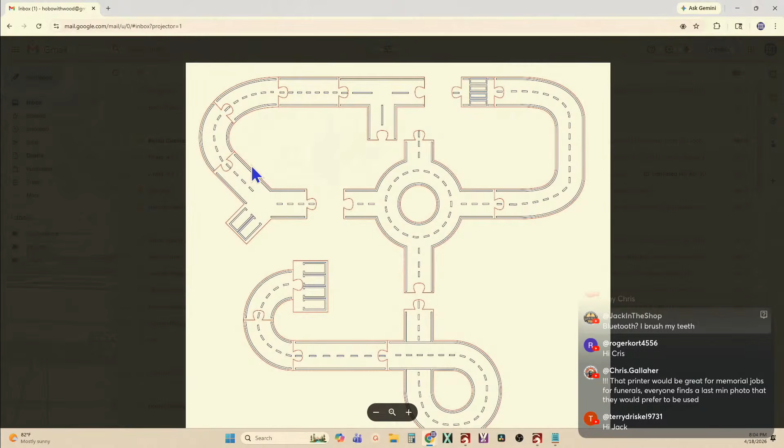I had a request - excuse me for drawing a complete blank, I think it was Barry, pretty sure it was Barry, that sent me an email asking for some help with something like this. Let's get it over here. He's wanting to do something for Hot Wheels, something he can laser engrave and cut out and disassemble. He said he bought a few different patterns but is having nothing but problems with them, which is typical when the stuff you buy doesn't say LightBurn ready or tested and approved - if they don't have an actual photo of the existing product, you can bet there's probably going to be problems with that file.

But I'm going to show you how easy it is to create that live tonight, and also something else that I did.

If you didn't catch this week's stream, but you did catch the live last week, I finished the photo for the memorial. And this is a friend of mine. She has passed, but this isn't a death photo. She hated having her picture taken. Every time I take a picture, she's just like, so, but after I put it in the frame and on here, it's like, oh man, it looks like I took it in the casket, but I didn't. She was a good friend, and I hate that she's not with us anymore.

But this I finished. It's the prototype. I haven't got that online yet because there's a few other things I've got to tweak. But I ended up going with a different color for the frame other than the leaves, and I used the reason that the maple leaves, baby maple leaves, really really small, they are red. And from what I understood, they're red to protect them from being sunburned. And so that's why I did that. And plus, the additional single sheet of the green that I needed was going to cost me $20. So I said, no, I ain't going to do that. So we went with the red.

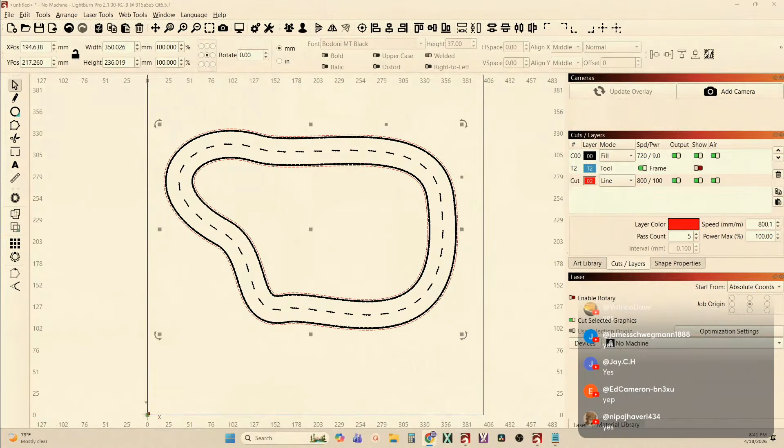Yes. Okay. Thanks, Jack. The problem is the way I've got this set up right now, I can't see your comments as big as I need to. They're very, very tiny. If I go back to this screen, oh, wait a minute. It's amazing how much you can forget in a week. There's the comments. I'm sorry. We'll get back to LightBurn now. Yep, there we go. I was trying to read them little bitty comments in the corner of the screen. That didn't work. All right. So now I've got you back.

Okay. So Barry is the one who reached out and said he wanted to make something for Hot Wheels. So let's take this and I'm going to say bye-bye. Now, this is my ghost machine. I forget what size this is, but that's the beautiful thing about LightBurn, you don't have to work with that. You can make it whatever size you want it to be. How big do you want your track to be? Do you want it to fit within a 4 foot by 4 foot area? Well, if that's the case, then draw your rectangle, and we'll go to inches and tell it to be 48 by 48. All right. So there's 4 foot by 4 foot.

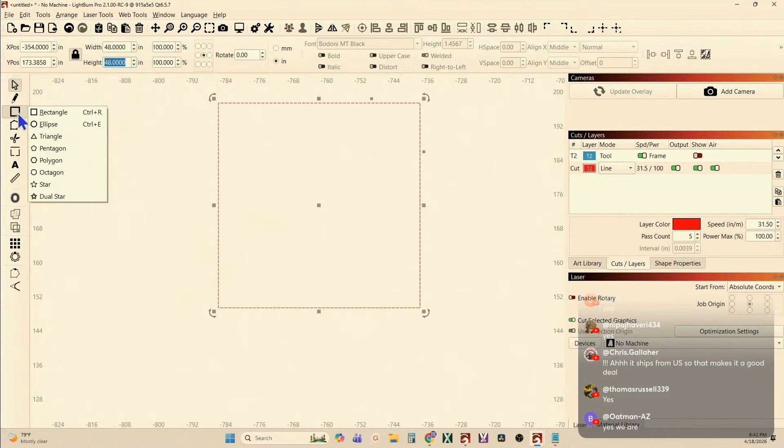Now I'm going to grab me an ellipse. Actually, it don't even matter. I could do a perfect circle, but since I'm going to drag this thing out and do something crazy with it, I'm just going to draw an oval to begin with. I ain't going to worry about making it perfect. There we go. Now, the image that Barry sent me had some crossroads in it. And you can do that, but you can't do it easily in LightBurn without running into problems. I want to show you again what Barry sent. There he is. Bring that over here.

So you see these are individual pieces that interlock together with puzzle fittings, so you can snap them together. But here's a loop. That's not a big deal. But this down here, well, I guess that would be an intersection. If you wanted to do a living hinge and actually have it raise up so one would go under, you could do that. But here I see these lines now. That's just done like an intersection. Yeah, I don't really like that. You bring it around. Okay, stop sign. Gotta wait. Okay, clear. Let's go.

But when you do this, and I'll show you the problem that this creates, wrong button, I need to go back here. Sure as the world, if I don't show you why it's a problem, somebody's going to try it and go, "What's going on?" But first, we're going to go through this real simple process. No loop-de-loops, nothing like that. We're just going to make a road course. So I've drawn a 4 foot by 4 foot area, and I've got an oval here in the middle. I don't want just an oval. I want to create a road course.

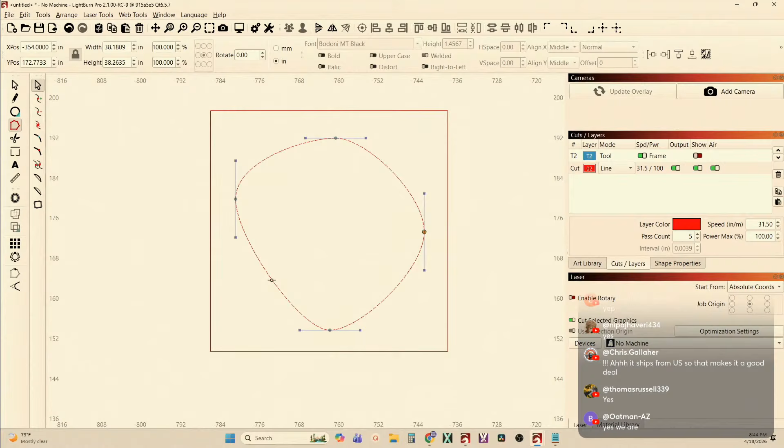So to do that, I'm going to convert to a path, go grab my nodes, and now I'll just start pulling nodes around. I want it to be contained within this 4 foot area. So I might pull it over here to there, and then this one. And actually, you know what? This is going to be my center line eventually, so I need to leave enough room around the perimeter so that I can do that. And maybe I come over here and hit letter I, insert a node, bring that up here. We're going to draw that down and draw that one on up here. So we'll start with that. In fact, we'll make it a little more like a kidney bean. All right. So there's my road course.

I'm going to take this, and now I need to think about how wide do I want each lane to be, and I want 2 lanes. I want 2 lanes, and I'm doing Hot Wheels. It's been a while since I played with a Hot Wheel, but what's that about?

We'll go big. We'll say each Hot Wheel is about 25.4 millimeters, or 1 inch. So that's 2 inches, and then a 1/4 inch on, so 2.5 inches overall. That'll give us two 1-inch lanes and a 1/4 inch on that perimeter. So if that's the case, I've got this selected. I'm going to come over here and do an offset, and I'm going to say both inner and outer.

And I'm in inches right now for you folks over there. And for the rest of the world, I'm in inches, I'm sorry. We'll do 2.5 inches, 2.5 inches. All right. So now you're starting to see a road course, right? Do not delete your original. Keep that. Say okay. Now you've got the inner and outer. You got this right here.

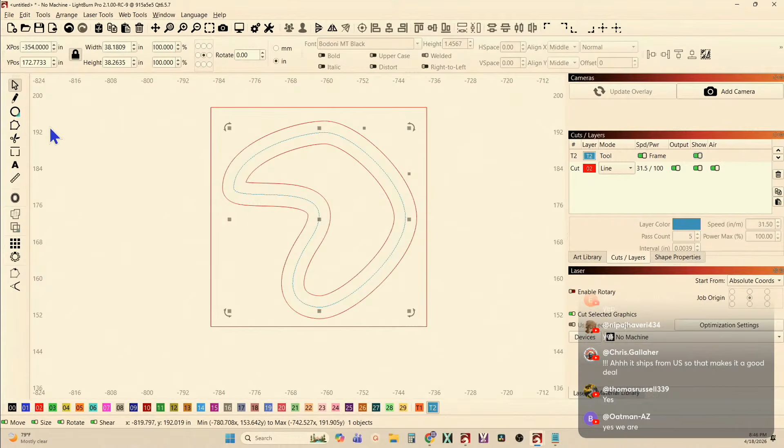I'm going to take this. I'm going to turn it into a... oh, where did my palette go? It disappeared. And when that happens, minimize and maximize. And there's my palette. All right. So there, I can put that on my toolpath. Turn my toolpath back on. Now that my toolpath's on, I'm going to come over here and grab my pencil tool. And I'm just going to draw a line. I'll put that line on the black layer.

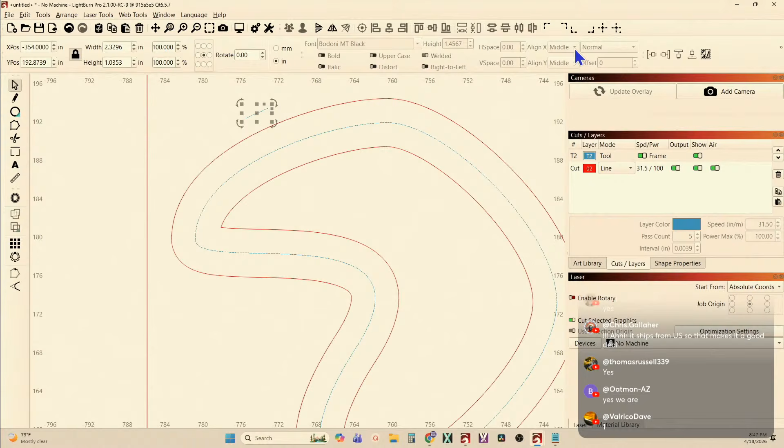Oh, and there, my palette's going. This is a new release candidate, folks. I'm on 2.1 release candidate 9, and I've got an issue going on. I've just started using this today. And when that palette disappears, that has something to do with Windows and the scaling options. Minimize it, maximize it, it brings it back. So I've not run into this until just now, because I've just started using this when I started making that memorial piece today. But let's put that on the black layer.

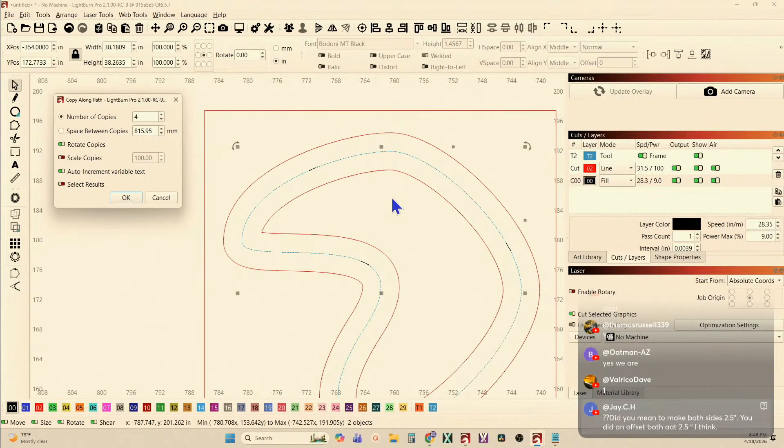Now that's on the black layer. I'm going to bring it down here. We're going to make it a little bit smaller. There we go. And I'm going to put it there on the line. And now I'm going to hold shift and select the toolpath, go to arrange, and copy along path. And I'm going to move this over here out of the way so I can see my dashes. I can't see the bottom because it's not a live screen and you can't scroll. But you can see here, these are not oriented correctly. You need to tell it to rotate copies. And now it'll rotate the copies and stay on that path.

Let's give it 40 copies. That looks pretty good. 40. Say okay. And now if you want to see that really good, we'll come over here and turn the toolpath off. There you go. Now, I don't want those little bitty dashes. Those are going to be extremely difficult to see if you try to engrave them. So I'm going to hold shift, click on this black layer, and that selects everything in black.

Did you mean to make? No, I didn't. Did you? No, you're right. I should have done an inward and outward offset of 1 1/4, which would have been a total of 2.5 inches. So yes, Jay, you're right. Cardboard cookie for Jay. He found a goof, but watch how easy that is to fix.

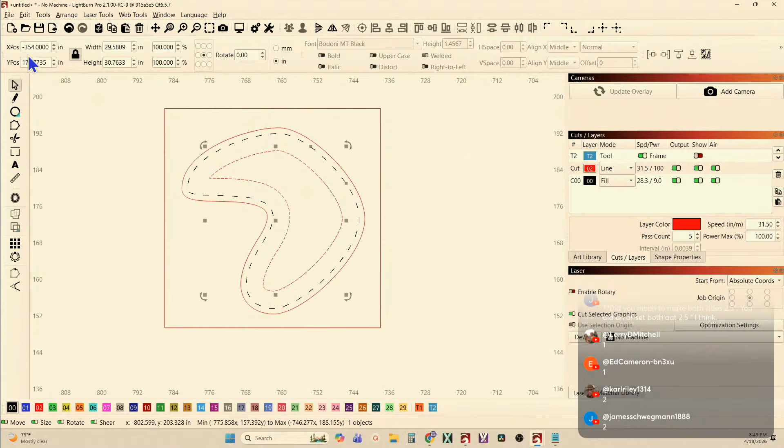I just got to come back over here, do an inward only, and do 1 1/4, and delete the original, and come back over here, and same thing. Oh, no. And here, there's an example of how, when you try to do a loop, the way LightBurn looks at those, there, I needed to go the other direction, but because it's an internal piece, you have to think backward. When you take and twist it, and you'll see this in a minute, what was out becomes in. So you need to be careful when you start twisting it.

So I'm going to Control Z, undo that, and come back here to offset. And this one needs to be outward instead of inward, and delete the original. Okay. So now if I zoom in and measure that, that should be 2.5. So from there to there, yeah, 2.5 inches. Thank you, Jay. So there we go.

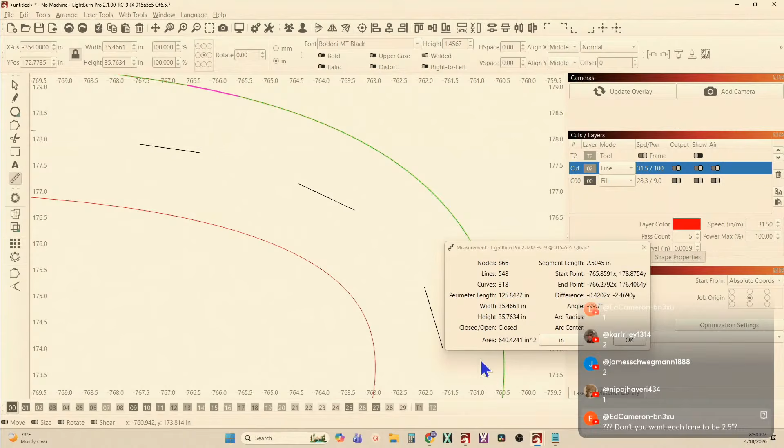But now hold shift and select all of the black layer. And now do an offset of all of that. But let's do maybe 2 millimeters, not 2 inches. I need to go back to millimeters, offset 2 millimeters, and delete the original. Say okay. Now you've got some pretty good dashes that are going to engrave around your road course. But here, actually, I need to say offset outward. Yep. And we'll do 3 mil. Say okay.

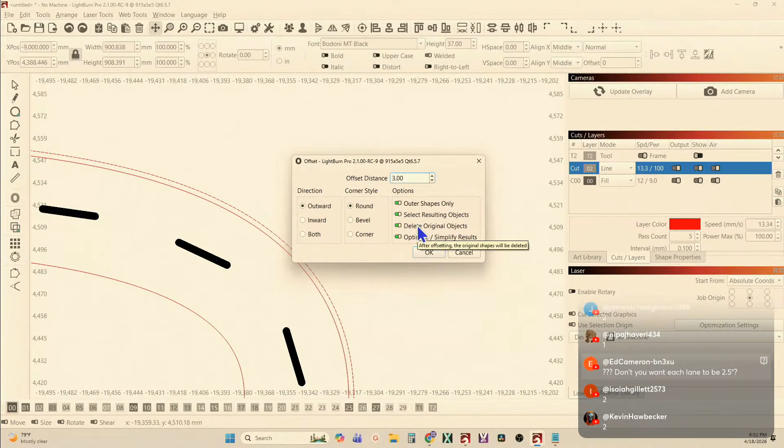Oh, I had to delete on. Change that. Go back. Offset. Turn off your delete original objects and say okay. Now you've got those there. Now I just did a 3 millimeter offset.

And because that's what I did and said okay, if I want to recreate that exact same offset without having to go into the offset tool, all I have to do is hold control, select the line I want to do an offset on, that one, hold shift and click on the offset tool.

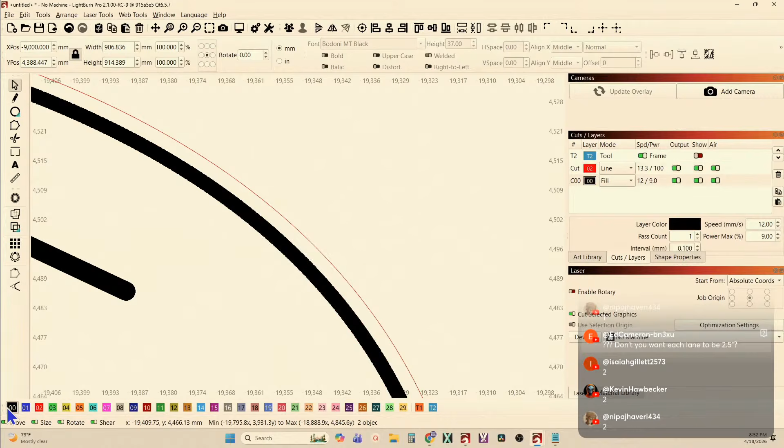What happened? Did it do the wrong one? There's one. Yeah, it did it there. And I want to see why it did what it did. Outward, inward. And say okay. All right, now you'll see why I wanted to do that. If I grab these two, put it on the black layer, there's an engrave, and there's my cut.

So come back over here to this one, and now I want to do an outward 3 mil and say okay. I want to do it again, so I can hold shift and just click on it, and there we go. Select those two, put it on the black layer, and now I got a road course and dashes, and it's, you know, ready to set up and cut out.

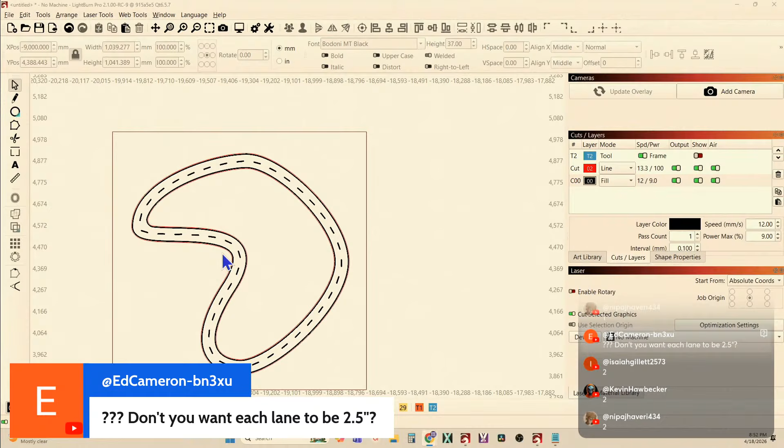No, it's not. No, I didn't want each lane to be 2.5 inches because the cars are maybe an inch wide, maybe. And actually, I don't even think they're an inch wide. They're probably about 20 mils, maybe about 3/4 of an inch. But right now this is about the process because I don't have them Hot Wheels here. I'm going from memory, and I'm thinking they're about 3/4 inch wide.

But you could, if they're needing them bigger, and plus this is something else that somebody asked me before. Before Barry specifically asked for something for Hot Wheels, I've been asked multiple times about how to create something for HO trains. They're not dioramas, but you want to create a city or a town or whatever. Well, if you know what your scale is, you know how to scale up your design.

This is about the technique about how to get there. You use your scale to begin with to help figure out what your big dimensions need to be. Now you know what they need to be. Now I'm showing you how to get it there. You need 2.5 inches for drift racing. Yeah. And that way you're not worried about hitting the car in the other lane.

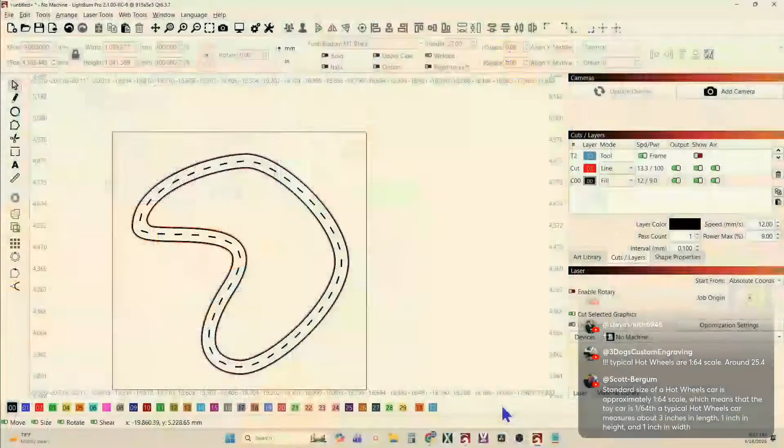So back to LightBurn. Back to LightBurn. That's not LightBurn. That's LightBurn. All right, so how am I going to get this out?

Now, I would want to know, what material am I going to cut it out of? How big do I want these pieces? And that's something else to think about. How are you going to, when it's taken apart, how are you going to store this? And what have we got here?

Typical Hot Wheels are 1/64 scale, around an inch. Okay, that's what I was going with. So this gives me a 1-inch lane with a 1/4 inch curb. Standard size. Okay, we got it. So I was guessing, and I guessed right.

All right, I used to collect Hot Wheels, but a long time ago. Still got some of them. Squirrel! All right.

So how are you going to store it? Where are you going to store it? Something you could do - you can make your own box to collect it and put it in. And then you could make it whatever size you want it to be. But do you want it to be something that's 18 inches, 16 inches long, that you got a whole lot of shelf space? Or do you want to make it all fit within a 12 by 12 area? Think about that, because now you've got your design, you need to know how it needs to be constrained.

And for this demonstration, we're going to go with 300 by 300, or 12 by 12. So I'm going to do, and I have not done - I'm doing this right now for the first time. I've got the concept, but I haven't done this, so we're gonna see a couple of undos. But what I would start with would be...

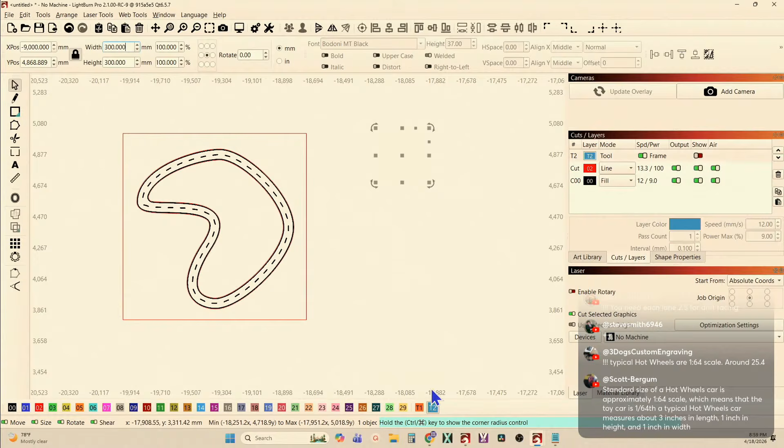A 300 by 300 square, not a rectangle, 300. Put that on a tool layer for now, turn my tool layer back on so I can see it. Put that in the left top. There we go. Now I'm going to take that and do a grid array. I'm going to do 4. I need to turn off my random orientation, do 0 spacing, no padding between edges.

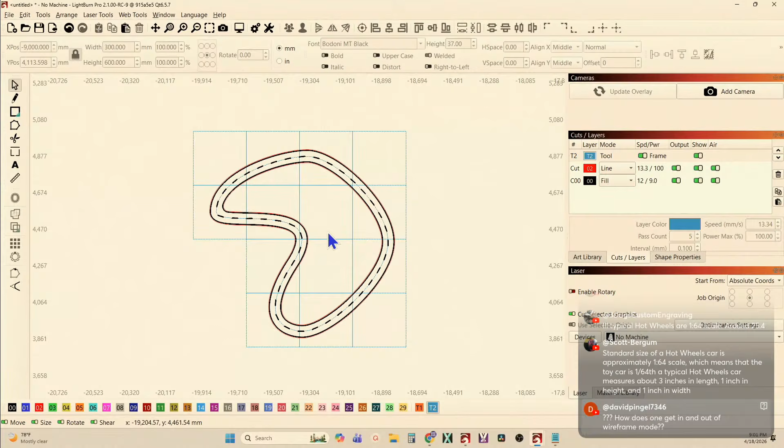So I can say, okay, in fact, I can go ahead and get rid of this. Goodbye. So now there is all the pieces that would be required to cut this out. I can see I don't need that - oh, ungroup it. I don't need them, delete those. And the rest of them all have something on it.

How does one get in and out of wireframe mode? You can do it a couple of different ways. For me, I use the keyboard shortcut, Alt Shift W. Get over here, Alt Shift W, and that goes in and out. Alt Shift W, Alt Shift W. But if you go into Window, right here, wireframe smooth or filled - and see, that's extra work to go in and find those. So Alt Shift W is easy because you can do it right there with 3 fingers. Alt Shift W. Alt Shift W. All right.

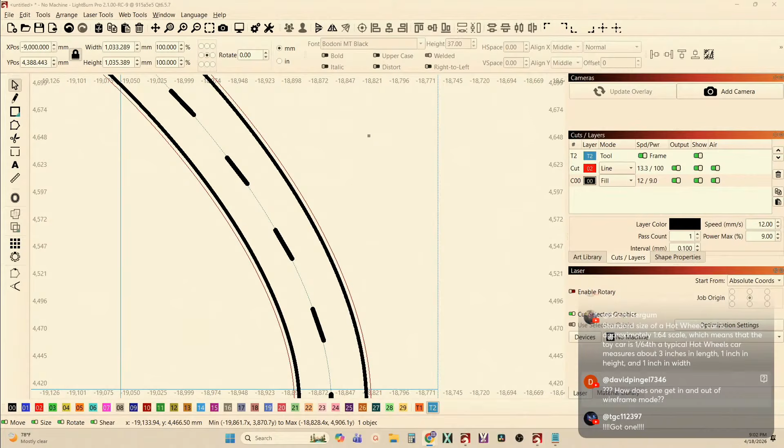All right, Alt Shift W. There we go. All right.

So now, like I said, I've got a grid. I can see what fits in here, but these are 12 by 12 or 300 by 300 pieces of material. You don't want to try and cut that out from edge to edge on a 300 millimeter piece. So you would actually want to create that grid probably out of 10 inch by 10 inch. That gives you about an inch around each side of it. All right, so...

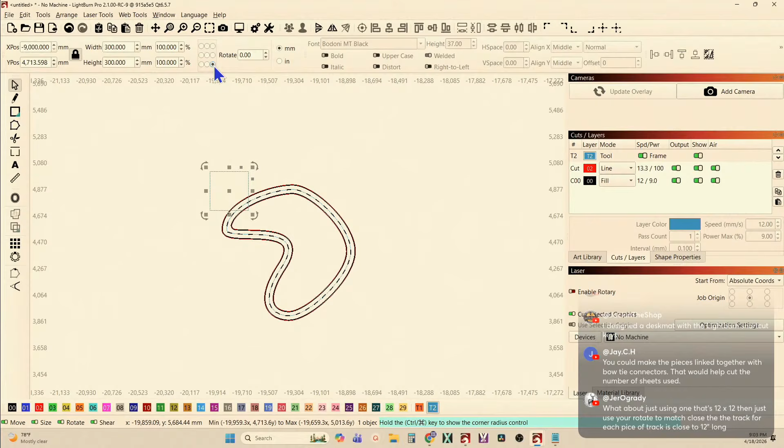Let's do that. Told you we're going to do some undos here. We're going to get rid of all of these, and we're going to take this one. I'm going to put my anchor point at the bottom down there and tell it to be 10 by 10, and then do the grid array.

All right, so now I can see where I'm at. Get rid of these, I don't need that one... or those first. Well, no, that's it. All right, we'll start there.

Now you've got a 10-inch piece right there. You see that's going to need to snap on. You can move these around and position them however, but how do you create the puzzle pieces? How do you get them to interlock with each other? That's what everybody wants to know. Well...

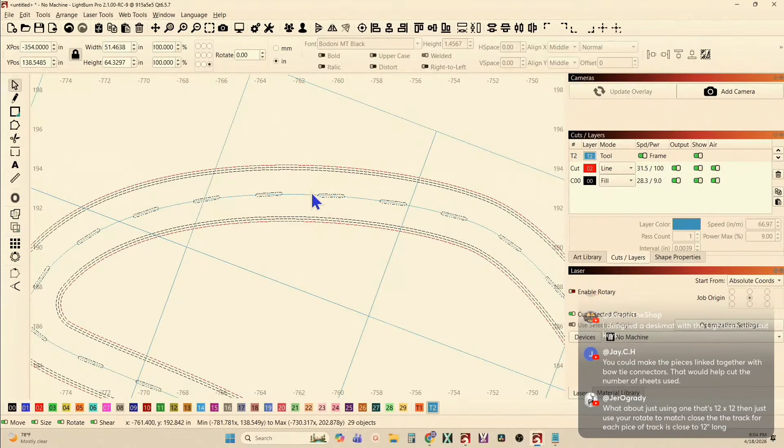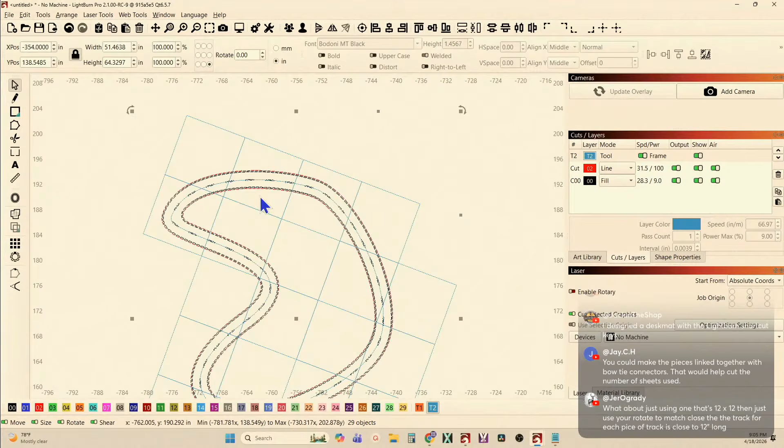How important is it that you are perpendicular to the curb? Is it a big deal to have—and this is all personal preference—but if I put that cut there to where I'm about 90 degrees across that road, and I can put a straight line here and put a puzzle piece in here, that's going to bisect it, put it in 2 pieces. But if you're not worried about it being perfectly perpendicular, then you can just put the knobs in there anywhere you want them to. That would be the easier thing to do instead of trying to constantly rotate it and all that. And it's a puzzle, it doesn't matter. As long as it's in the center, I think you'll be all right.

But how would I do that? Well, I'm going to grab my pencil tool and come down here and first draw a line—a straight line that goes from one to the other. There we go. Let's put that on... I'm going to get my selector tool, put that on the cut layer. And see, my layers are going again—this is an update issue. Put that back on the cut layer. There we go, all right.

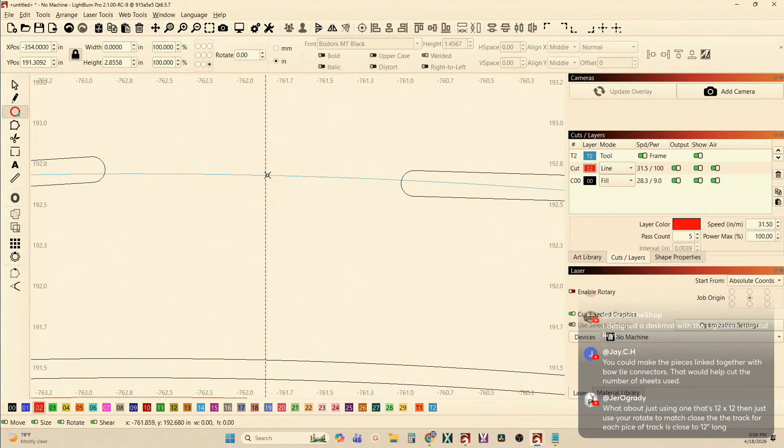Now I'm going to get a circle and come right here in the middle. I'm not going to draw a perfect circle, but I am going to hold control—is it control to hold? Yeah, holding control will keep it there in the center, so it expands from the center. Control shift gives you a perfect circle, but I don't want a perfect circle. I do want that oval, I think.

Perfectly perpendicular parallelograms, yep, had a few of them. And that's about 3/4 of an inch, give or take. I like the oval shape. It needs to be able to interlock with one another—that's why I went with the oval. The circle would probably work too, but I like the extra reach of that oval reaching in there.

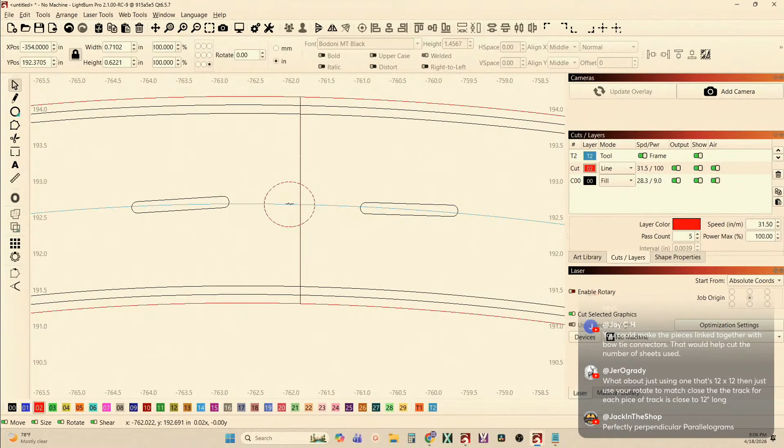But once I had that centered up there, I need to pull it off center, keeping it on the center line like that. And then I can create with my scissor tool—scissors right here—get rid of that, and that. Now I've got a piece that's going to interlock in there because this comes back in so that when you snap that together, it's extending inside there. So it's not just going to be slid together, it's locked together. All right, so there's that, that's done.

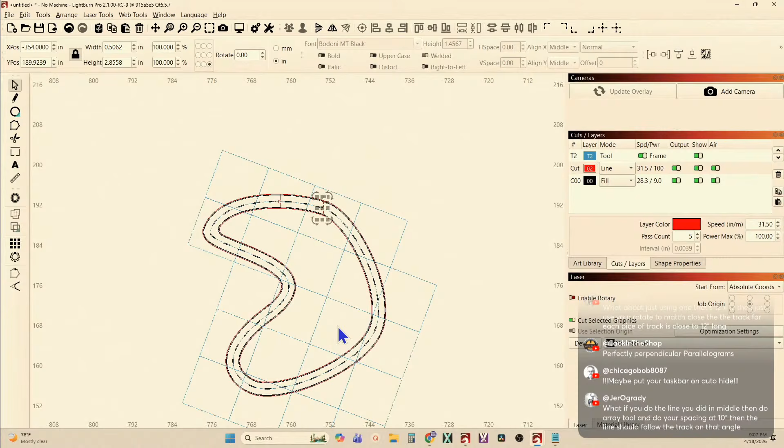Now I could actually take this, go back to my selector tool, and I've got that. I can just say duplicate that and bring it around to where—and now here's where you're going to start playing with your pieces, positioning. I'm guessing you probably don't even need this now that I look at it. You're going to take this right here and position it where I can get the maximum amount out of that piece of material, which would be about like that. And I'll take this piece and rotate it.

And put it in between the lines, in between the lane markers. And I could even flip it so that it had a nipple on this side, a nipple on this side if you want to. But now, that's going to give—you can keep doing that and keep positioning. In fact, I just thought of this.

Watch this, this is pretty cool. This is actually going to be really cool.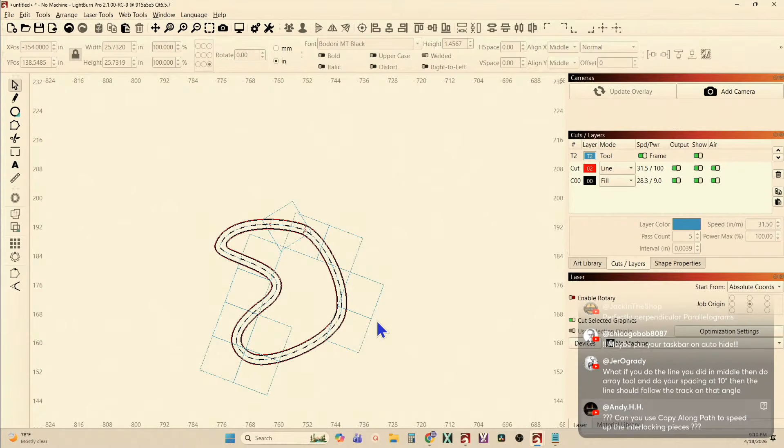So, let's do all of those suggestions. Let's get rid of this, let's get rid of this, because this is actually going to be a much, much better way to do it.

All right, first let's do -- oh, you know what, I think you can even just get rid of this one. I've got this one original. I'm going to select it, hold shift and select that center line that's there, and then tell it arrange, copy along path.

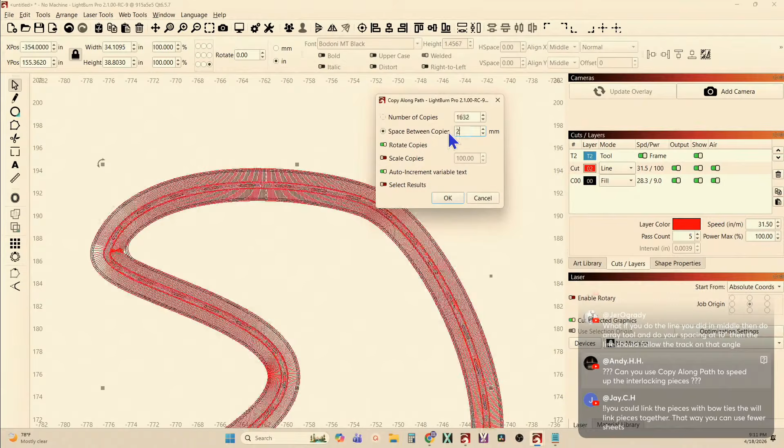It needs to rotate with the copies, and then set the space between copies to 250.4 millimeters, that's 10 inches. All right, so now those are spaced 10 inches apart.

Now, there's a couple places where that has a problem with your little lane markers, but that's for looks, it's not going to be an engineering issue. But there, we just made our interlocking pieces and spaced them 10 inches apart from one another and rotated them around the design.

Say okay, done. That's done. Now let's take and get us a square. Oh, let's see, I need to get my tool path. Dadgummit.

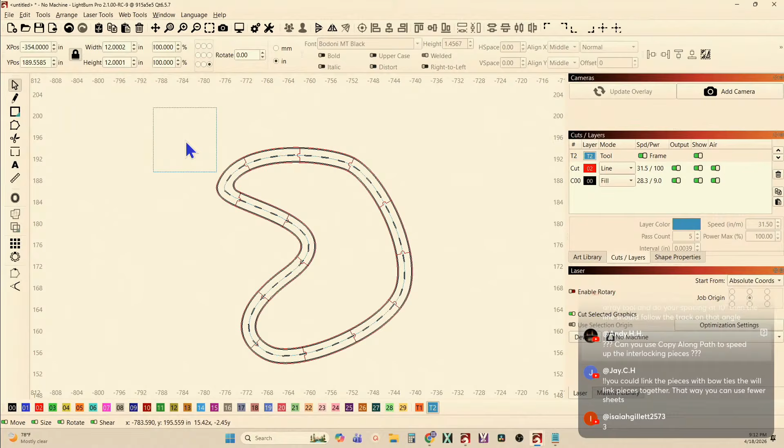Tool path, rectangle. And we're going to tell it to be 12 by 12, or 300 by 300. Now take that and we're going to put it in the center of one of those pieces like that.

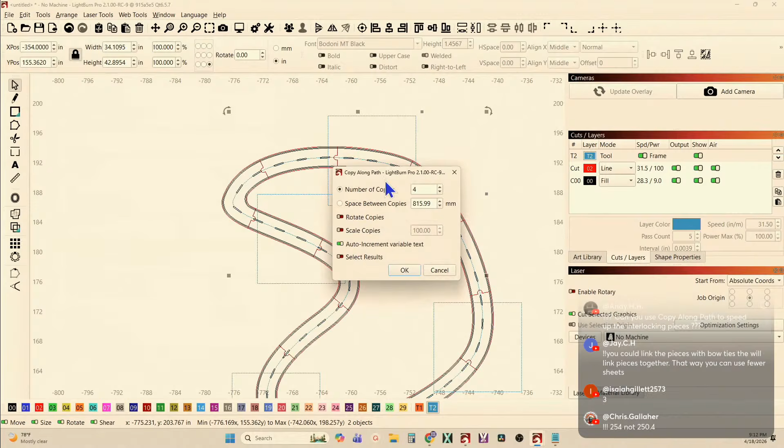There we go. And then hold shift, select that tool path and go back to arrange and copy along path. We need to rotate the copies. And how many copies do we need? Well, we don't know, that's what we're wanting to find out.

We'll just keep increasing them until that right there would work. That would work. Now, right now we've got individual cut lines and they're not attached to the pieces. Let's go say okay, done.

So now we know that each one of those pieces are going to come out of a single piece of that material. But this cut line, that's a single cut line, and I need two of those, one for each side of that.

Oh, did I? You did. You're right, I put the decimal in the wrong point.

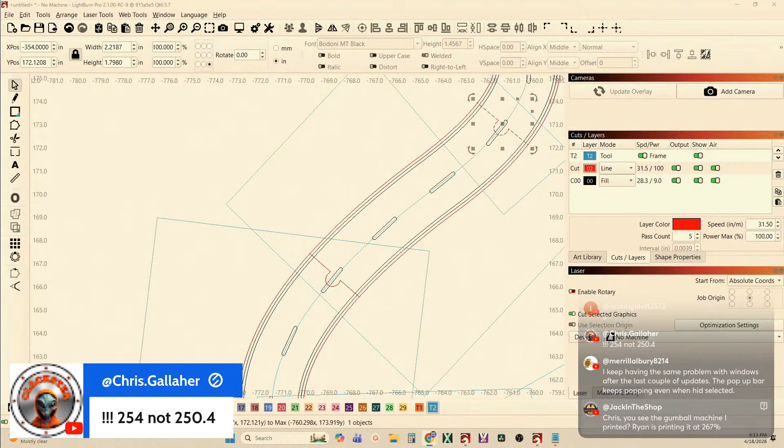You could link the pieces with -- oh yeah, bow ties would work too. You could use fewer sheets. I don't follow you on how that would use fewer sheets. But bow ties would be something else that you'd have to keep up with. You got to think about this, are you doing it for yourself? Bow ties would actually look pretty cool if it's something you're doing for yourself and an adult's doing it, and it's going to look good and you're going to keep up with it. But if you're doing this for your grandkid, bow ties are one more piece that's going to get lost. So, but yeah, bow ties would look cool.

Not sure what that means, Jay.

All right, so back over here. So I could come in here and select that and select that one, and I'm going to Control D, duplicate it. So those two are duplicated.

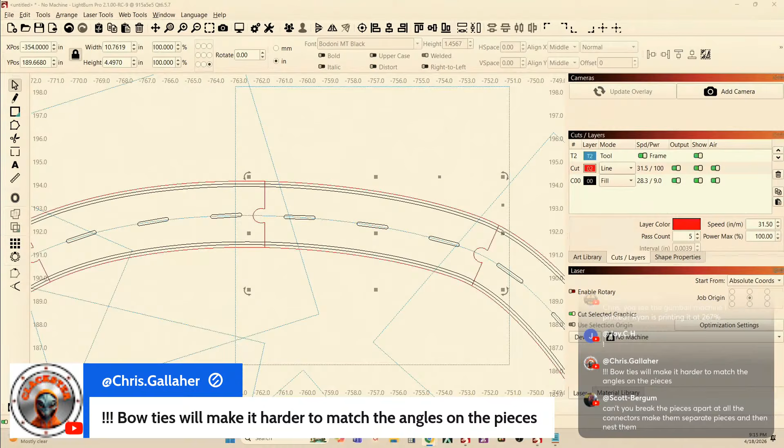And bow ties will make it harder to match the angles on the pieces. Yeah, because if you're in a curve or something like that, you'd have to be real careful with putting the design together.

Can't you break the pieces apart at the connectors and make them separate pieces, then nest them, and get more than one piece out of it? Absolutely, once you've got them, we need to know that you're going to definitely be able to get it on the material, but once you've got them out, yes, absolutely you could do it.

Each sheet would be 12, not 10. Yes, each sheet would be 12, but I'm doing this at 10 inches just to make sure I'm able to get it onto the 12-inch piece and not have it too close to the edge, or if it was an odd shape like this corner piece, making sure it all fits on there.

Again, we're learning together about how to use copy along path. We're doing a lot of that tonight with creating the lane markers, using copy along path to help strategize how many sheets we're going to need. Is that necessary? Might not be, because once we've confirmed we've got them all there, we can see that it's all going to fit on that many sheets.

But as it was mentioned, you can nest some of these and get multiple pieces on one individual sheet. This is just to ensure they will all fit on at least one sheet, that nothing's too big, and by keeping it under your maximum size, you're double ensuring you've got room on your material.

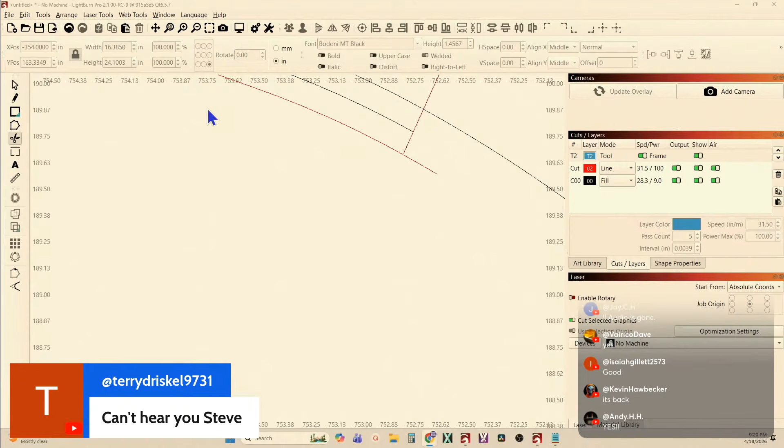Let's select this piece, go to node editing, and just hover over that node and hit the letter E to extend. Because if I try to drag that down and past it, I may or may not keep it in a straight line. But if I just hover over that node and hit the letter E... well, it ain't gonna work. E is supposed to extend that straight down to that line.

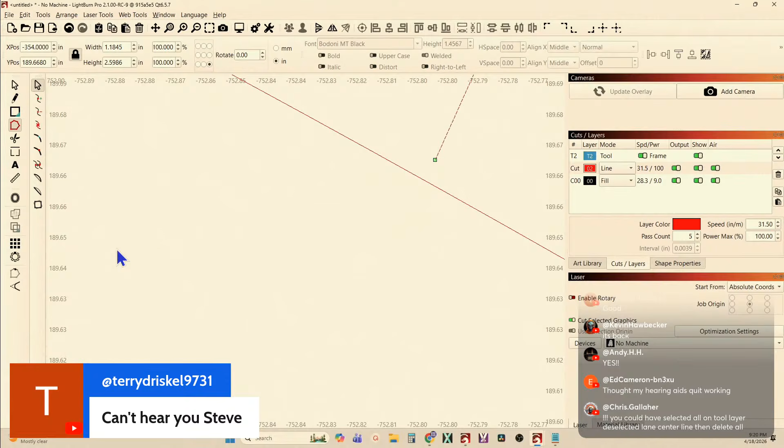I'm having all kinds of problems with this release candidate 9, Chris. Stuff's not doing what it's supposed to do, it's not working. You could have selected all on the tool layer, deselected the lane, and then deleted all.

I think some of my issues, and see, the color palette's going again, I think some of the issues I'm having tonight right now is this release candidate, because I didn't have any of these issues with release candidate 8 or 7. So something's going screwy here.

In fact, I need to stand up, so let's hit our magic button. Hit our magic button. Oh my. Oh, and I've got a back brace on I need to take off for a minute. Okay, I almost feel like grabbing 1.7 and starting over, but we're too far into this to do that. Oh my.

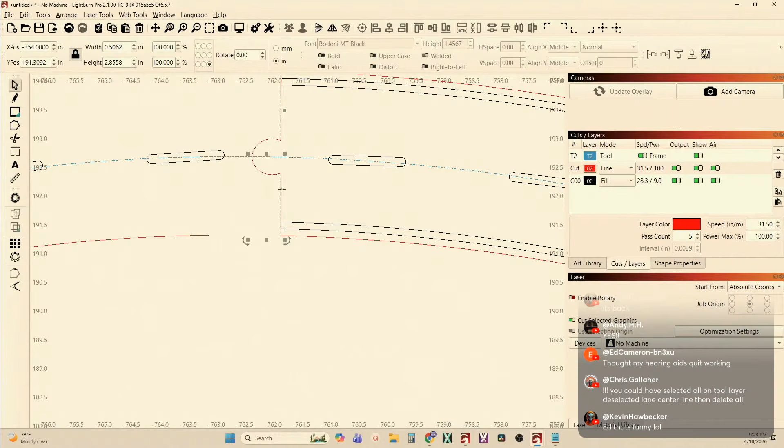Let's leave that alone. I think the duplicates, yeah, Control Z. I think because I did duplicate it. Yeah, this is definitely a LightBurn issue tonight because those are duplicates. I remember I created 2 duplicates because I thought I was going to need them for the piece I'm creating, and I'll need them again for the other pieces on either side. So I created a duplicate, and you can tell by looking at this screen, that's an individual.

And if you come up here and click on this one, you see a halfway flashing ants, but it's not grouped, and I can't select just one and delete it. The whole thing goes away. So I'm going to come down here to these and see if that maybe wasn't the issue. Just for giggles, we'll go to our scissors. Here. Yep, it's looking like that's going to work.

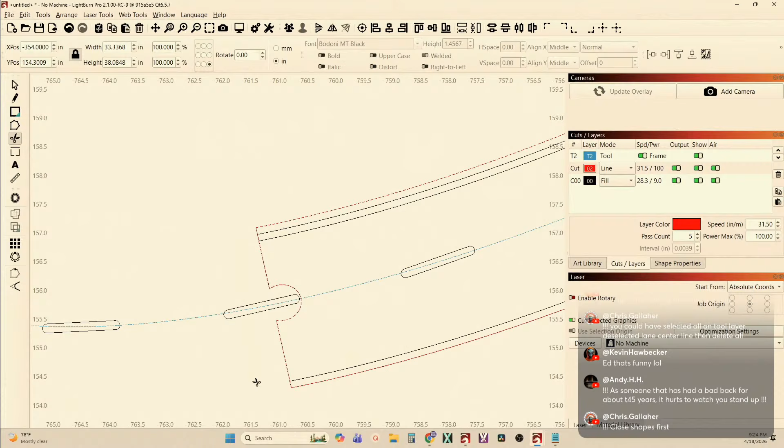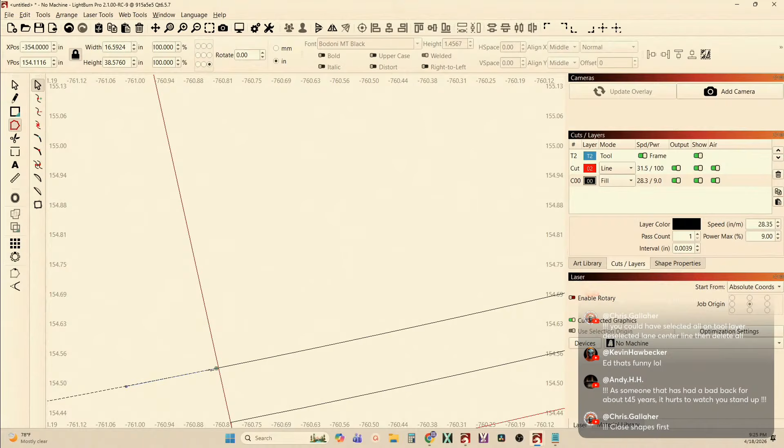That didn't. That one didn't. That one didn't. Huh. Oh, that time it did. That was weird. All right. Node editing, insert a node, and scissors and cut. No, it still won't cut. Usually it cut to that next node. So go to nodes, B for break. This is not the way to do this, folks. This version of LightBurn's giving me problems.

Now I should be able to hover over that and hit the letter T for trim, and it should trim right back to that line. But let's see. T. Nope. It trimmed it all the way. Yeah. LightBurn's giving us troubles.

As someone who has had a bad back for about 45 years, it hurts to watch you stand up. Well, now that I'm up, I feel good.

Closed shapes. I've never had to do that before. In fact, I just cut off a whole bunch of stuff. I think there's an issue, Chris. In fact, just for giggles, I've got 1.7 open because, you know what? Let's do this. Not 1.7. This is actually 2.0.05. I've got 2.0.05, I've got 2.1 release candidate 9, and 2.0. All right.

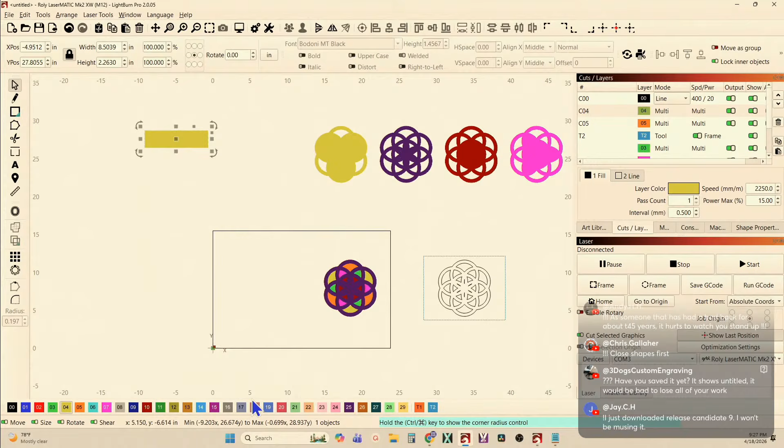So I want to try something real quick, though, because of what Chris said about closing shapes. There's a rectangle, and let's put it on a cut path. Actually, you know what? Let's do it different. We'll do an offset, outward, and don't delete, say okay. Now draw a straight line and a straight line. So that's kind of what we had back there.

And if I grab my scissor tools, I should be able to come in here and cut, and cut, and same thing. See, the scissors are working fine in this version. But there's something screwy going on in that other one, because that's a perfect representation of what I was just trying to do, and it wasn't cooperating. But I think you kind of got the idea about how easy it is to create those tracks.

And I want to show you this real fast before we get off of that subject. That one was a bust, but I think it was a bust because of LightBurn. I honestly do. I found my problem with LightBurn on this computer. Nothing past 1.7.08 will work. Got a few people confused as it worked up until 2.0.5, but now it doesn't. Yeah.

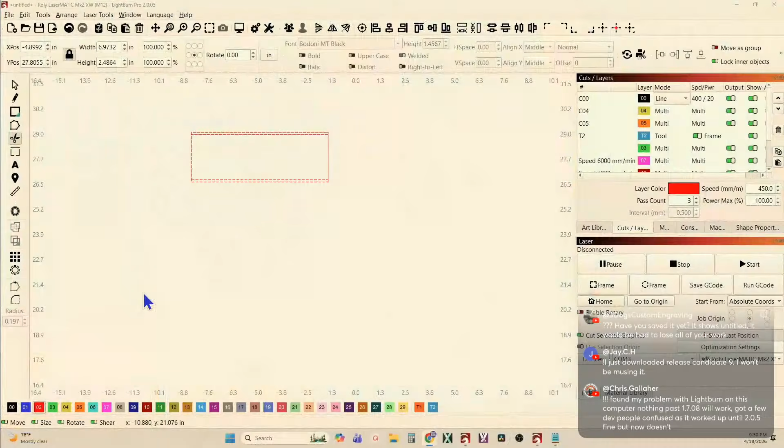So we're going to select all of this, get rid of it, and let's get an ellipse, convert it to a path, show our nodes. And now this is how easy it is to create a loop. Grab this handle and spin it around. And now you can create kind of a figure 8 looking thing going on and draw it out, get it even bigger.

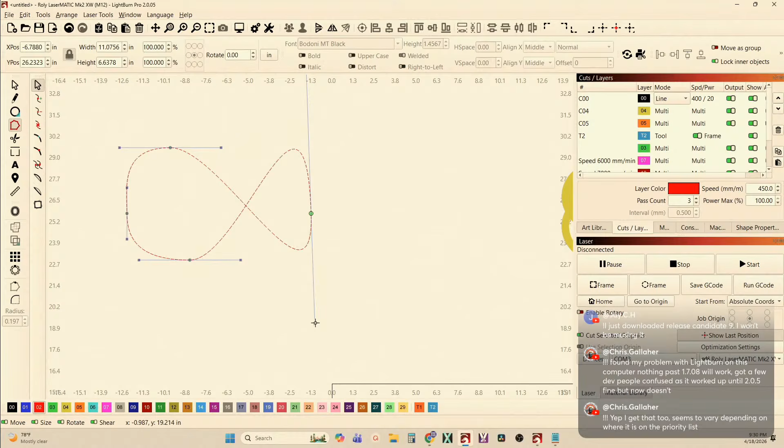But now here's the problem. Here's your problem. If I select it and I come over here to my offset tool and I'm telling it to do an outward offset, we're going to do an outward offset, and let's put it in there for metric for everybody in the world to understand what we're doing. Offset, and do a 3 millimeter offset outward.

Well, if you look at this side over here, there's our dotted line. There's our original. There's outward 3 millimeters. But if you come over here to this side, it don't know what to do. It's going, huh? What are you talking about? Well, we just inverted this side of it. So this is the inside of that circle. I'm sorry, this is the outside.

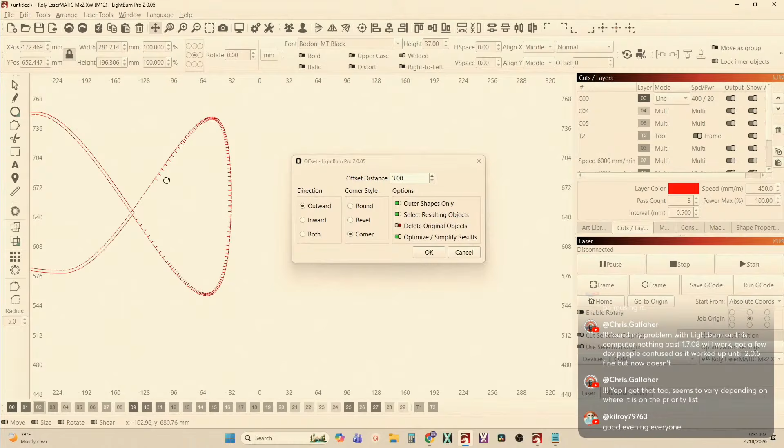This is the inside when we're looking at it, but because we flipped it, technically this is the outside where all these little lines are sticking out. That's the outside of that. And it confuses LightBurn and it says, hey, I can't do that. So that's why you don't want to use that technique to create figure 8s.

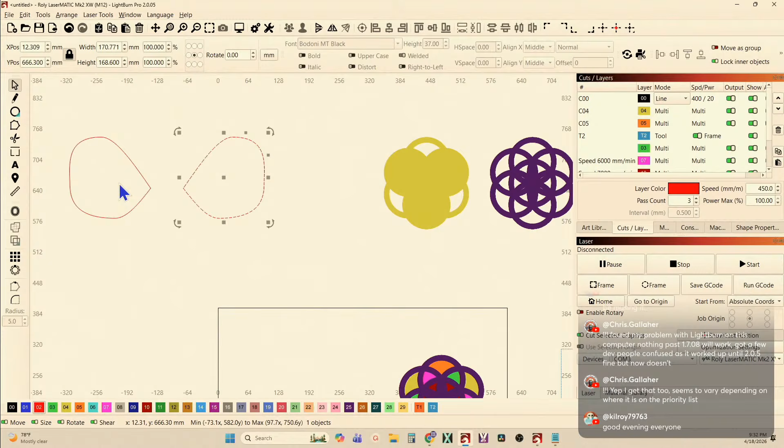You could create a figure 8 by doing this. If you say that's the shape you want it to be, take your scissor tools. If you've got a properly working version of LightBurn, you can just click that off. That's done. Grab that right there. Control D, duplicate it, mirror it, and then slide it over here out of the way. And grab that and Alt Shift H to bring them together.

And now you've got two pieces in a figure 8, and you can go into offset. And when you tell it to do an outward offset, it gives you an outward offset all the way around. So when you start seeing those lines instead of an offset, it's because you've inverted what was inside outside and what was outside inside. All right. So let's do this, because that version of LightBurn turned that one into a bit of a crapshoot.

Let's look at doing one of these multi-layered pieces, and it doesn't have to be with craft paper. I'm doing this with craft paper because it's inexpensive, but this is how you could learn how to do multi-layered pieces, and you can use the craft paper to test the design. And then once you see, hey, this looks really, really good, it would look even better if it was multi-dimensional, because when you're doing it with paper, it's going to be thousandths of an inch thick.

Whereas how many layers will I have here? 1, 2, 3, 4, 5, 6 layers. 6 layers on 3 millimeters, 18 millimeters is going to be almost 3/4 of an inch thick if you did it on 3 millimeter material. So let's look at this real fast, because this is something we can do completely without having a problem. Let's get rid of this.

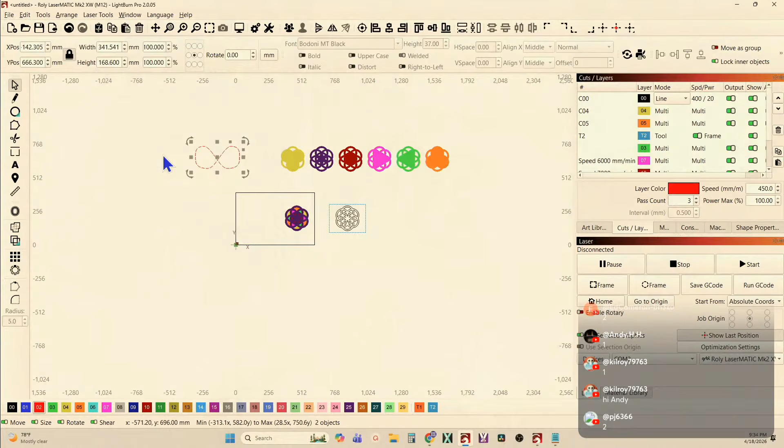And here you can see all of the layers, everything stacked one on top of the other. You can see the different multicolors. You could go in and add more detail to this and create a different design on just these outer pieces. But I want to do a quick, simple design and show you how you create each individual layer. So to do that, let's come over here, set this over here, and oh no, he has replaced Amazon boxes with craft paper.

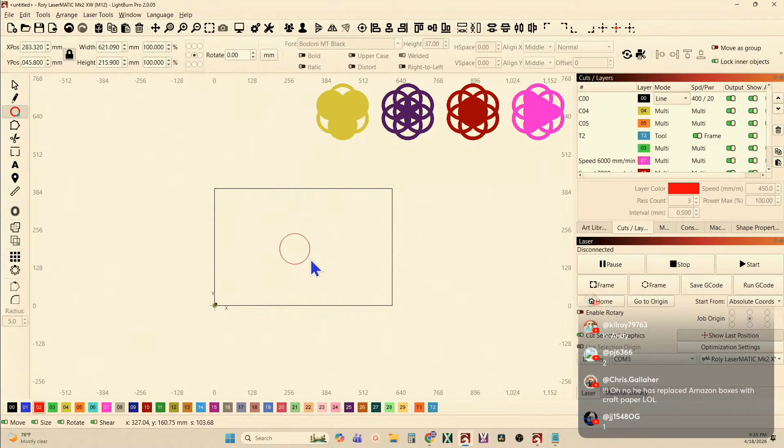Let's get a circle. Let's draw out a perfect circle. And we're going to duplicate that. Control D, duplicate it, and then bring it up to the top center right there. And hold Shift, select that one, and do a circular array. And we'll do 6 copies and say OK. All right. You're starting to see that up there? All right. Before you do that, though, Control Z. I forgot to do my offset.

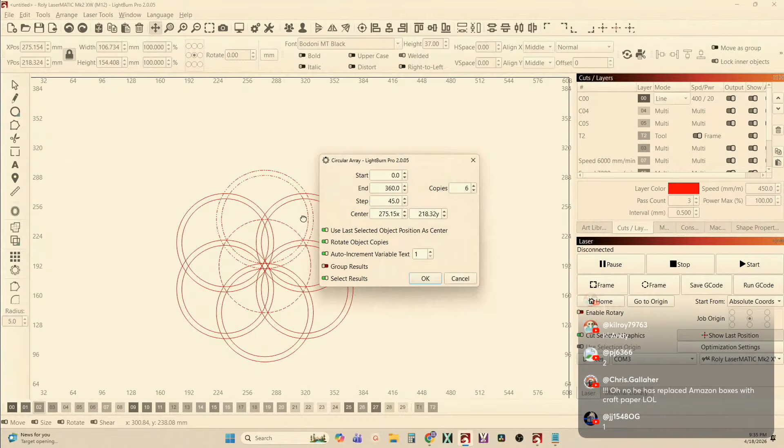Let's do an offset both and delete the original. Say OK. It didn't delete the original because I didn't select it. Get rid of that. Group that. Now those are grouped. Hold Shift, select that. Do my circular array and say OK. So there, that one's not as much of an offset as what I had up here.

But you can see there's my shape. There's my shape. We'll get an offset on this one. Delete the original, say OK. Now, I want to take all of those and weld it together. Done. So now I've got me a nice little geometric shape.

Now, if I'm wanting to do multi-layer pieces, I find it's so much easier to see the layers as you're building them by putting them on individual layers in LightBurn and putting them in fill mode. And then you change your priority in the cuts and layers orders over there so that you can see which one's on the top, which one's on second, which one's on third. You can actually create the actual visual representation by changing the priority of your layers in the cuts and layers folder.

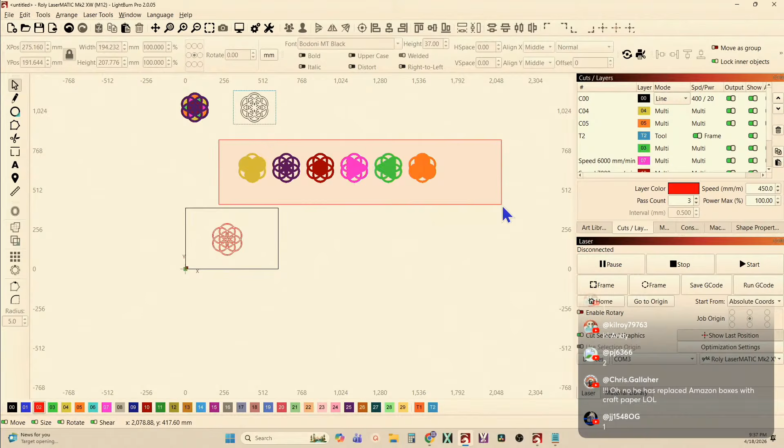So this is going to be, I need to get rid of all this so I can free up my layers. So this one we'll put on, it doesn't really matter. We'll put it on a green layer and it's in fill mode. And we're going to duplicate it. Control D, duplicate that and bring it over here. Now, I want to get my next layer. I'm going to duplicate that one more time, bring it right here. I'm going to ungroup it.

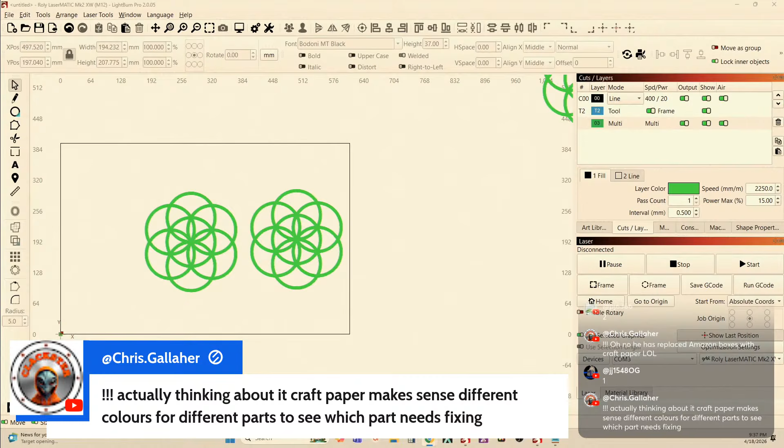And actually think about it. Craft paper makes sense, different colors for different parts to see which part needs fixing. Yeah, yep. A whole lot better than just trying to do it out of the same brown cardboard. And craft paper like that is fairly inexpensive.

But here you've got another layer. This is going to be the second layer. It's going to go underneath this, but we need to make it different. Well, what do I want it to be different? What do I want to see in this one? Well, let's see here. We're going to go to ungroup it. And I'm going to go to wireframe mode because it's easier to select individual pieces. And I'm going to say I want to have these inner pieces filled. Oh, I didn't ungroup it.

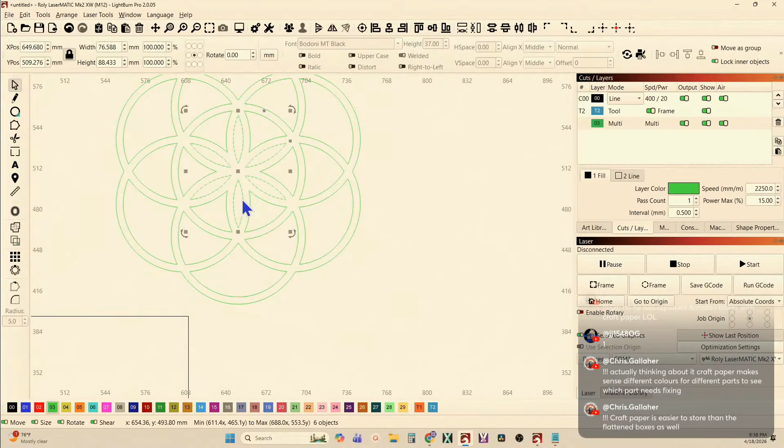Ungroup. There we go. So I'm going to select that. Come on. Actually, it's coming in to grab all these right there. And I missed one there. Put that on a different layer. Put it on an orange layer. And then maybe just the outer one out here. Grab the outer layer and put it on the orange layer. All right. Hold Shift and select the orange layer. And that's going to give me that right there. And put it in fill mode. No, that didn't quite work.

But here's how, if you didn't want to use a bunch of craft paper to figure out what works, what don't work, using your layers like this also works with allowing you to be able to see what the result's going to be. Let's group that. That's grouped. This one is grouped. So if I put those bullseyed and then see, it's like, okay, wait a minute. All I see is my orange. That's because the priority is wrong.

And to me, the priorities in the LightBurn software is actually inverted. Whenever you're stacking your colors like this, whatever is on the bottom in LightBurn is actually what's going to be on top of your design. So I want the green layer to be on the bottom. And there you go. Now you can see what that orange layer would look like on that. And that's not what I wanted to do. I was like, oh, I messed up. Actually, all I wanted was those. I should have left those. So let's go back.

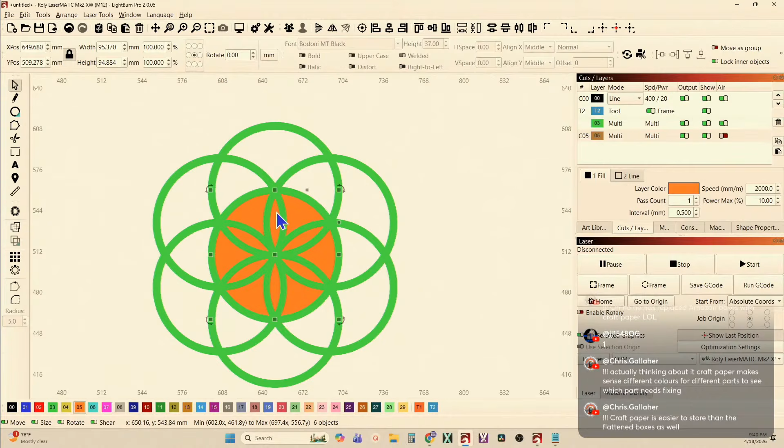Go to Alt-Shift-W. There we go. I want those to be solid. So actually what I want to do is, does it go here, here? Grab all of those and put those on the orange layer. Alt-Shift-W. That'll fill that. Oh, I know what it was. Oh, and now, let's see here, take this outer layer, the outer piece, because I need the perimeter so I can stack them easily.

And with that, because I did that, I think I need to get rid of that. Yep. I didn't want those. Or did I? I didn't want these. That's what it is. I need to get rid of those. Alt-Shift-W. Get rid of those. Delete them. There. Now, I don't want any of this green, so I can get rid of all of this green.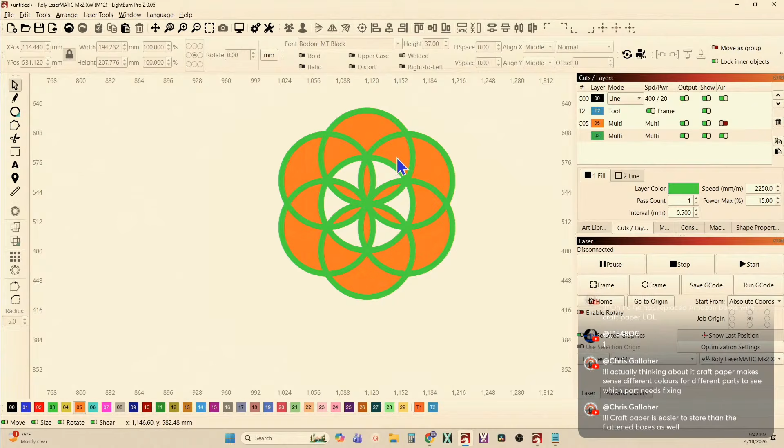Group it. Alt-Shift-W. And stack it. Bullseye it. And get my order in correct order. Bring that green layer down. And there, I've got that. Now, if I didn't want this out here to be solid orange, I should have left those pieces in there. And just to show you how easy that is to go back, do that.

Put this in wireframe mode so we can see it. There we go. Control Z, undo, undo, undo, and put all of that on the orange layer. Group it back. And I'm going to leave it in wireframe mode. Bullseye it. Change my priority. Put that green on the bottom. And now show you in filled. Alt-Shift-W. There you go. Now you've only got those filled in orange.

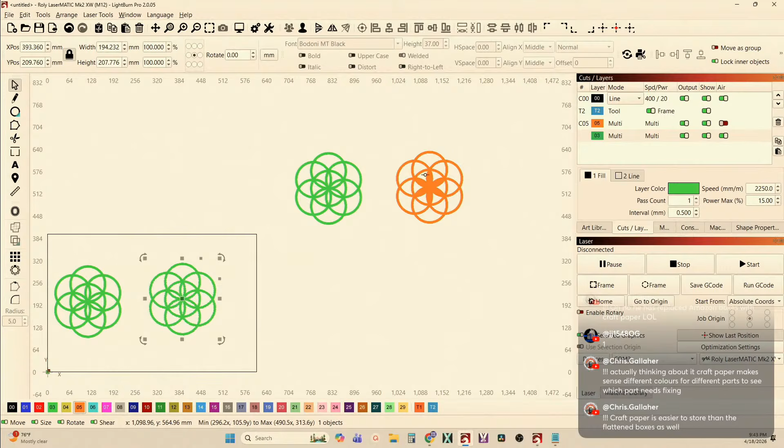Now you can create another one on another layer. So let's look at that. Control Z or just pull them apart. So you delete the pieces that you want it to be in the color. So let's grab that. Pull it over here, duplicate it, and I want to have these pieces in a different color. As I keep coming out, I'm going to change colors. So those are the ones I want to delete.

So ungroup it. And these are going to be the ones that get deleted. There you go. Because now you can start to see that's going to be filled. So keep coming around. Delete. And delete. Put that on another color. And we'll use gold. Why not? Group it. And we need to continue to move that down in priority.

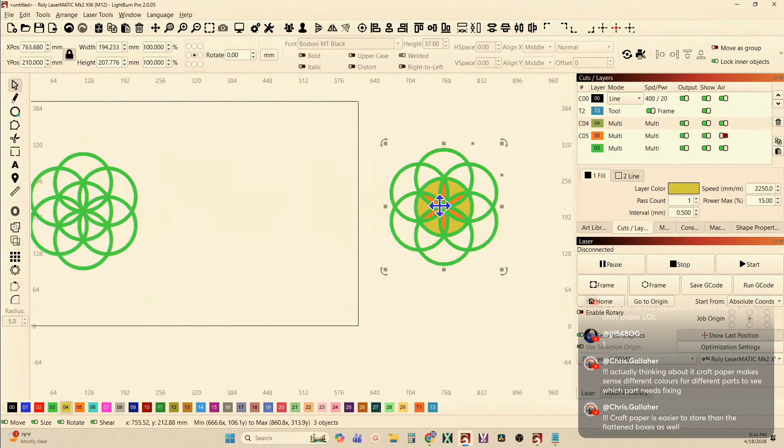So now I've got green, orange, and gold. And if I select all of them, bullseye them, and Alt-Shift-W, you got 3 layers, 3 distinct colors. They're all going to line up and stack one on top of another. Let's grab that, pull it over here. And now I need to change these here.

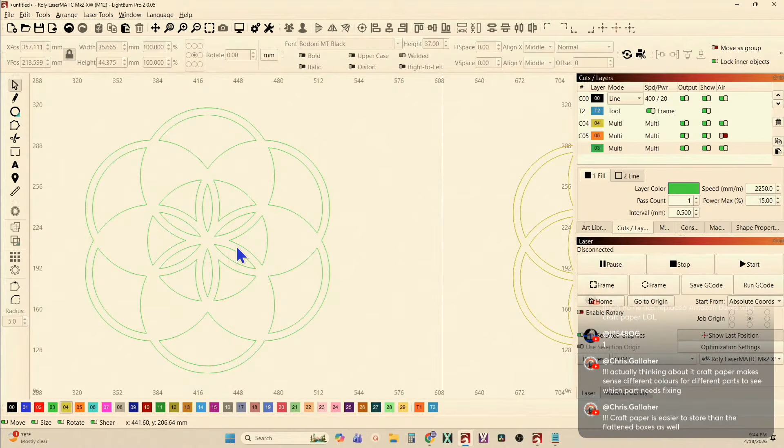So let's grab that, duplicate it, bring it over here, go to wireframe mode, ungroup it, and select all of these here. And delete, delete, delete, delete. And actually, I think delete and delete. These are going to be cut out on your laser, but you're not going to see them because that's going to be on a much, much deeper layer. So to save time on your laser, you should be able to delete all of that. If I'm not mistaken, just delete it all.

And let's see. Take that, group it, put that on. We've already got orange. We'll use the 6. We got to come down here to 6, and we need to take it below the gold. So move it on down. Now, bullseye it. And Alt-Shift-W. Yeah, there you go. So anything that you've already selected the color for can all be deleted.

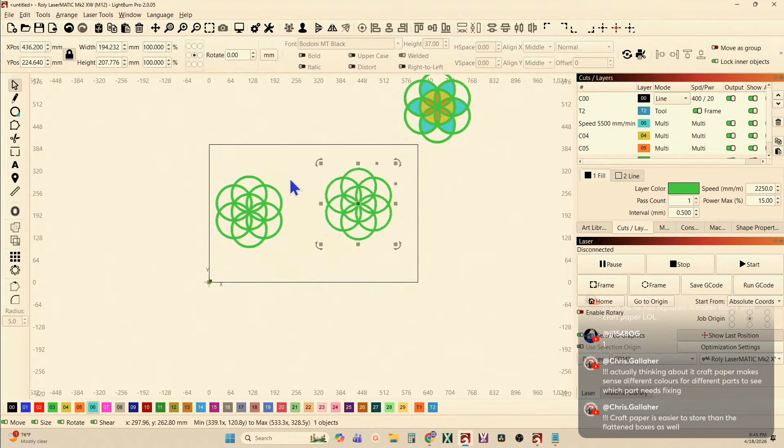So now I need just these out here put on a different color, a different path. Select that, move it up here. Let's duplicate it because I don't want to get rid of my original. We'll keep that, bring it over here. Ungroup it, Alt-Shift-W, so I get it in wireframe mode. And actually, let's go back and see that again. Yeah, so it's just these up here.

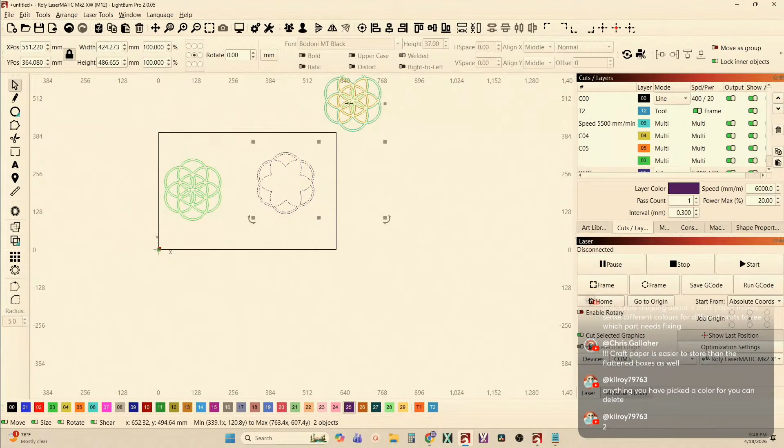So if that's the case, I need to delete everything but that. So I can just grab all of that and delete, and that, and all of that, and that, and that, and that. And put that on another layer. We'll put it on the purple layer and group it and bullseye it. Come on. There we go. And bullseye. Pull all that down here to the middle so we can see her.

And Alt-Shift-W. We got to change our priority. Move that to the bottom. The last one we did was the blue, so that's got to go all the way down below the blue. Oh, went too far. What'd I do? What happened? Oh, I went past. Oh, something wrong. Let's look at that. Pull that. I hold shift and select on that layer, and I can just drag it off over here.

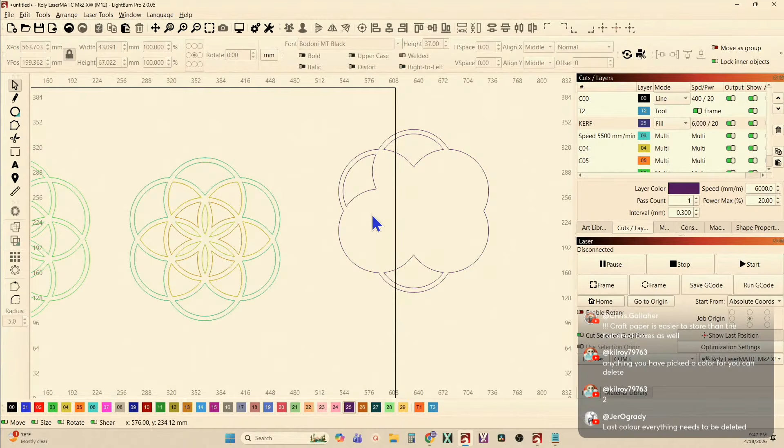Oh, I needed to delete that. Alt-Shift-W. I needed to delete those. Everything needed to be deleted. Wow. Ungroup it. And see, I was able to see that mistake without cutting material out and wasting material and not knowing that it was a mistake. So that's just a solid piece. And put that on here and bullseye it. It's in the right place. Alt-Shift-W. So there, I've got all the layers. So I can pull this over here out the way. Yep. We got there.

So now to select your individual layers, let's put this on a tool layer so it doesn't get confused with any other stuff. Now the only thing that's on a layer is this. We'll delete that, get it away.

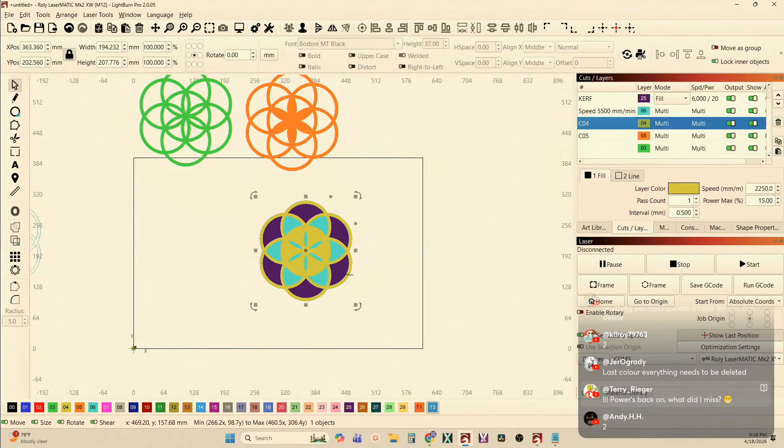Now I can come over here, hold shift, and select the green layer, pull that over here. Hold shift, select the orange layer, pull that over here. Hold shift, select the gold layer, pull that over here. Hold shift, blue layer. Hold shift, and that's that. So there's all the layers.

Now you're ready to cut them out. You put them on a cut path, and you go to town, and Bob's your uncle. You've got a multi-layered piece.

Power's back on. What did I miss? You missed a cluster. I was trying to use a brand new version of LightBurn, and it's giving me nothing but trouble. So I had to quit trying to design my road course because the tools weren't working right. The menus kept crashing and going away. So I ended up getting away from that tool, the road course, and going back to an older version, LightBurn 2.0.05, and was able to demonstrate how to create a multi-layer piece.

So just for giggles, if you didn't see that, we'll recap. Or actually, we'll go back here and show you this by just doing undo. And I need to change my priority. I don't know why. Why did the priority change? I don't understand that.

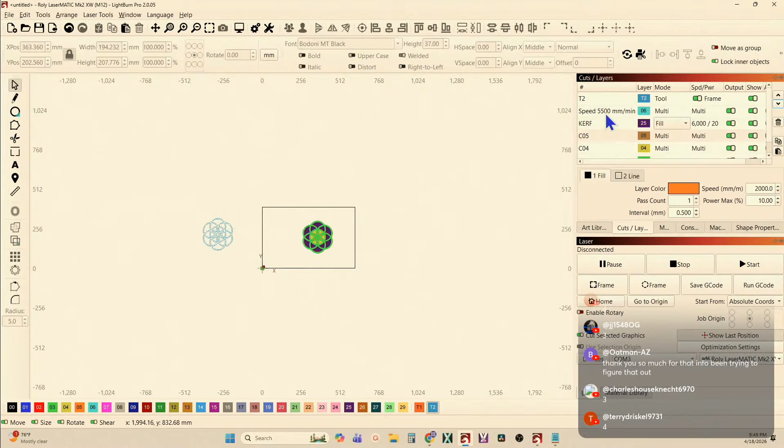So that's got to be the green. The green's got to be on top. Gold was next, I think. And then the orange, then the blue. There you go. So I created that multi-layer piece.

I did that using all those different layers so you can see how one layer is going to sit on the other. And as you just seen, as you move your layers around, it changes that by changing the priority, it changes its placement in the design. So if you're looking at it and thinking, wait a minute, that just don't look right, well the problem may be that you just got it in the wrong priority.

All right, where are we at? We're way past the hour or 90 minutes. So sorry about the road course, but I'm not accepting responsibility for that. I'm putting the blame on that on LightBurn.

I undid my priorities. I didn't see that, but yeah, because I know this version works. I just didn't know how the priorities got undone. Yeah, because when I thought I was undoing, I was just restacking them.

But anyway, I'm not accepting blame on the failure to create the road course, because I fully put that at the doorstep of that release candidate. And again, that's not a negative thing about LightBurn. It's a release candidate, it's what it's out there for, to find the problems, find the bugs. And we already know there's a ton of bugs with LightBurn if you're going to try to use Windows. The more advanced LightBurn gets, the more problems they encounter. So that's why I am entertaining getting away from Windows.